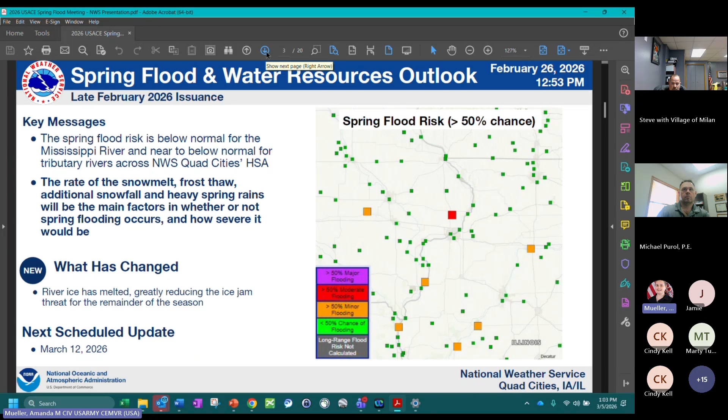So in general, things are looking below normal for spring flooding. So yay, I'm sure everybody's excited for that. It has been very dry. We've had enough warm spells that our frost has thawed in the local area, and it is thawing in other areas. So it's been decreasing overall, if not completely thawed. Probably after the next few days, it'll be a lot less too. And our local area here doesn't have really any snow other than maybe northeast Iowa a little bit, so we don't really have the snowpack. Up north, the snowpack is less. So overall, we're looking at it to be below normal.

So just looking at each of the factors here, and we'll get into each of these a little bit more, but as you can see, everything's either normal risk or lesser risk. The main normal risk is river levels overall are not looking as low as I might expect after such little precipitation in the last several months. And our frost depth when we did this was roughly normal. Now I guess it's if anything below normal since we don't have much. And looking at the spring weather outlook, maybe a normal risk. So everything else looks like below normal at this point.

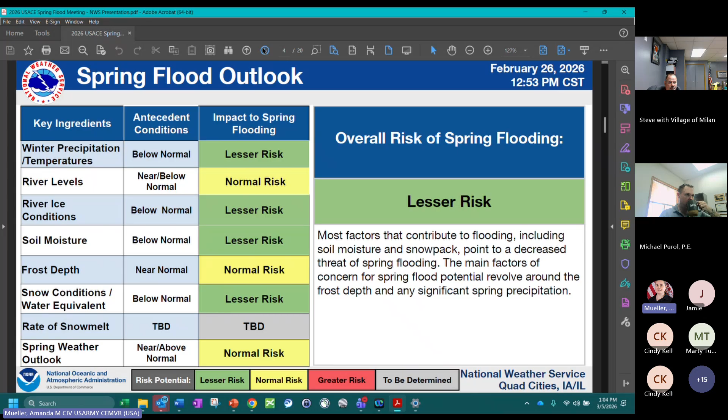So, not quite on. Okay, so temperatures and precipitation. Our temperatures in the western part of the state have been above average. Even though we've had some really cold temperatures, we've had some above normal temperatures, and it's kind of evened out overall to be pretty much average for the season. And for precipitation, you can see we've been quite dry. So no surprise there, we all experienced that.

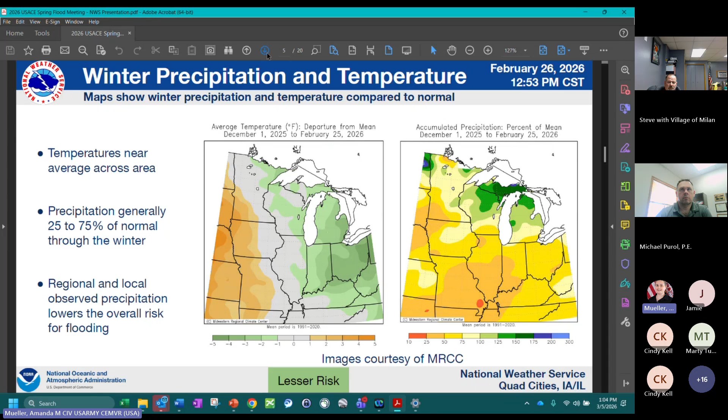And then looking at just the seasonal snowfall for the region, there's some snow to our north, and this was, again, from a week ago, so more has melted since then. But much of the snowpack to our north actually doesn't have as much liquid in it as you might typically see in a season. So while there is snow up there, it's not an overabundance.

Where you see the overabundance along the Upper Peninsula of Michigan and western lower Michigan is not coming toward the Mississippi River anyway. So I think they have an elevated spring flood risk over there. But if that water's not coming toward your area, then you're in the good spot, I guess.

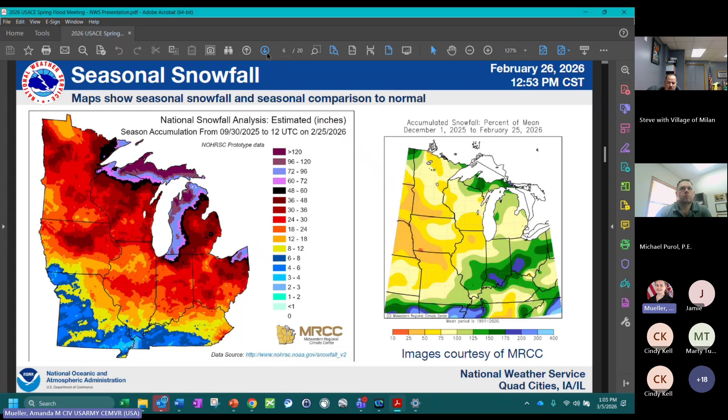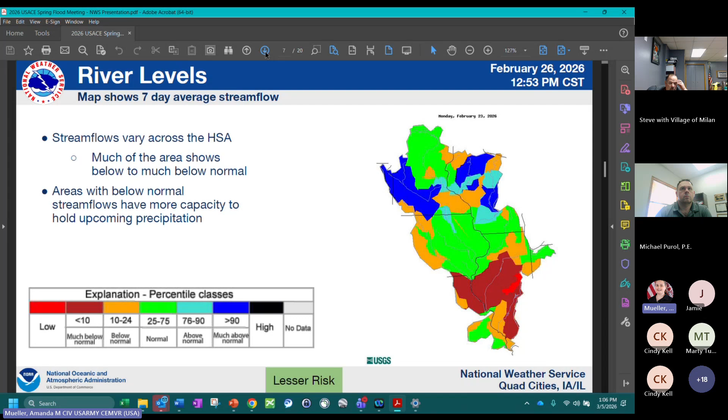And then stream flows, we're seeing a lot of them actually pretty well near normal. It really doesn't get below normal until you get south of here into kind of eastern Missouri and through central and southern Illinois. So eastern Iowa and northern Illinois are staying fairly close to normal right now.

And so when I did the first outlook of the season, we still had ice on a lot of our rivers. And then by last week, it was pretty much all gone. So we've pretty much eliminated our ice jam risk at this point. I think if we have a cold snap where a little bit is able to form, it won't get very thick and it's not going to last long at this point. So some more good news there.

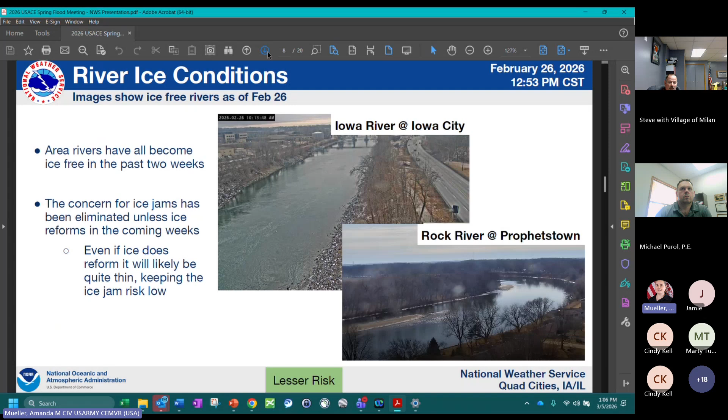And then soil moisture and our frost depth, you can see, especially for Iowa and Illinois, we're seeing a lot of single-digit readings, and then as you get into central Illinois, zero frost depth. And this was last week, so it's even lower than that.

And then you can see on the left side the soil moisture. So those warm colors are lower moisture in the soil. So the ground is able to soak in a lot of the rain that we might get. We've got some rain chances tomorrow and into next week, but hopefully for the most part, the ground will be able to soak that in.

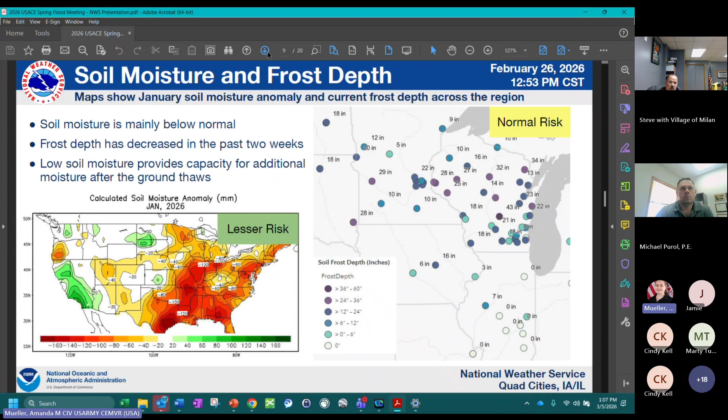So conditions are worsening a little bit here. Again, we'll see what happens the next week or so, if any of this can be downgraded a little bit, or if we kind of stay the same for a little while, because it's going to take some time to recover from this drought.

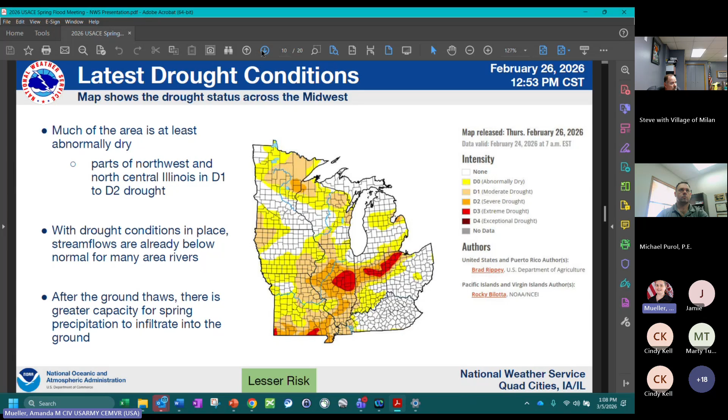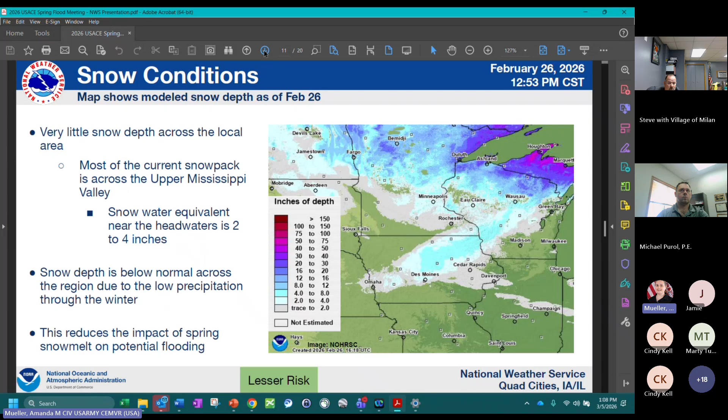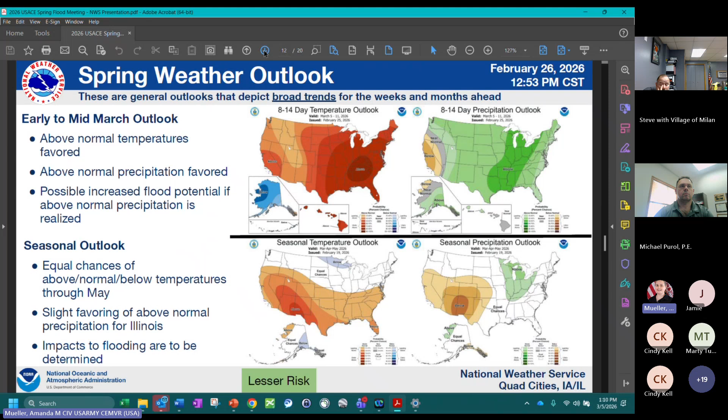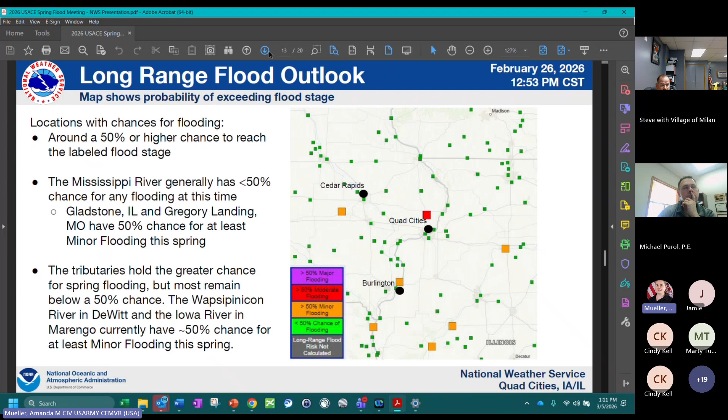The one red one there is the Wapsipinicon at DeWitt, and that's showing a 50% chance of reaching moderate flood stage. But I think these are some of the areas where we start seeing flood issues first. So nothing too major. So the key messages for the spring flood outlook: basically below normal probability. The one thing that could really change this is if we get into a really wet pattern and start getting a lot of rain.

If there's a lot of rain over the snowpack that exists to our north, and that comes down, especially along the Mississippi River, something like that. But if we get some light rains or very scattered rains, I think overall it should be able to soak into the ground, and we might see some rises in the rivers, but nothing too major.

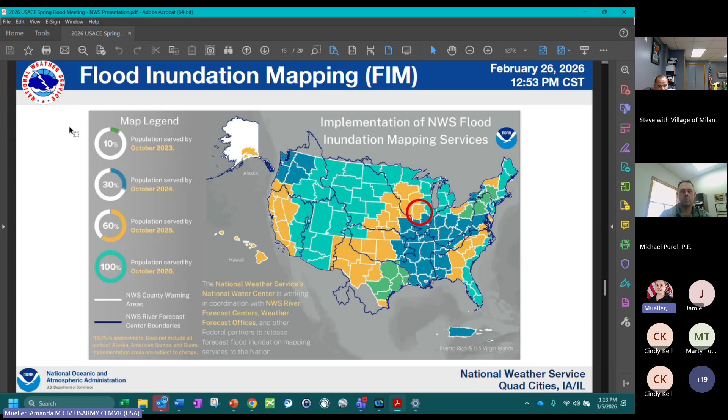We're checking a lot of areas where it is available to see if what is there lines up with what, say, emergency managers know happens when there is flooding. So we're still getting used to it. The rest of the country should be active with it by October of this year, and then we'll have these services across the country. So what is it? We're basically making a picture out of what we have been saying in words. So we say we're putting water on the map.

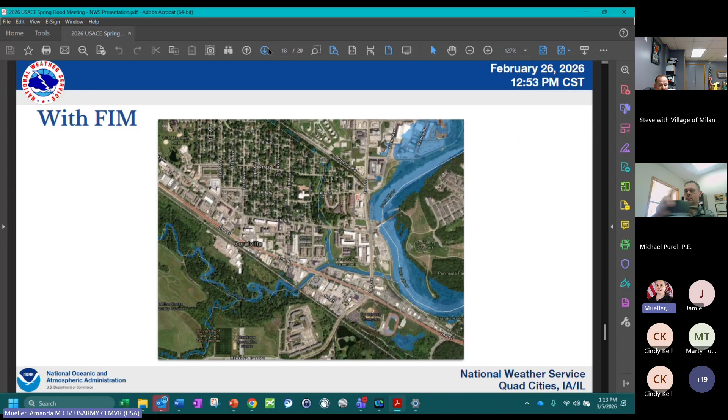So instead of having text and more text that you have to read through, it's going to look like a picture that can show you where flooding might be. This is just an example image along the Iowa River. There are two forms of it: dynamic FIM, the flood inundation mapping, and static. The dynamic FIM will take into account how much rain is expected, and then where we expect flooding based on that. The static FIM is more based off of, we know when the river gets to 23.5 feet that this happens, and then it makes a picture out of that.

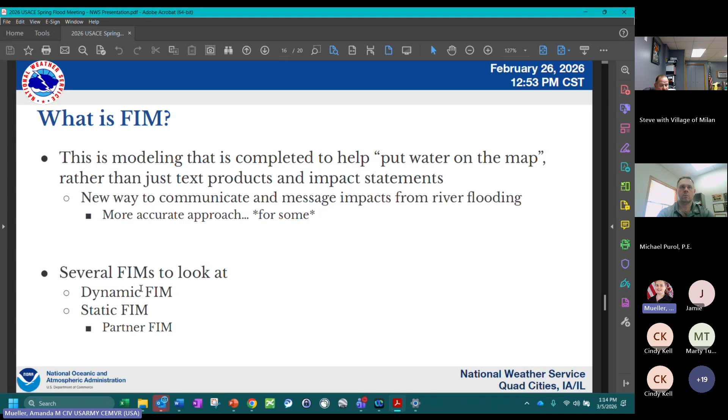So they're both used in different ways, and we only have a couple sites in our area that are partner FIM, with more detailed research, that can be used. I know there are some others outside of here, and probably people on this call outside of our forecast area, but they are few and far between overall. There are a couple of ways you can view the FIM. You can go on the National Water Prediction Service website, which is probably where you're getting river-related information if you're getting it from the National Weather Service.

When you go there and just add /FIM after water.noaa.gov, it will bring you to the site. You can see the CAT FIM is categorical flood inundation mapping, and that's the static FIM. So if you wanted to see if a location near you has that, you can go to the CAT FIM locations. There's also a GIS viewer where you can look at the FIM. I believe that is only the dynamic FIM, so it's only going to show stuff if there's flooding expected.

If you go there, though, you can see the entire country. And if you go south of here toward southern Missouri, southern Illinois, you can see some of it there. You'll have to zoom in to see it too. But you can take a look elsewhere if you want to get a feel for what could be available.

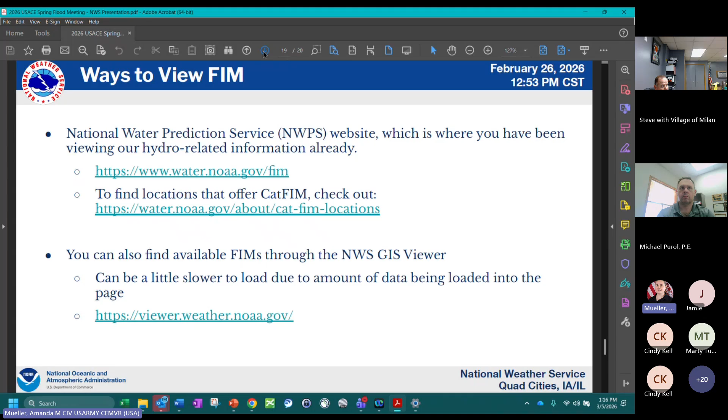And then the last thing here is our data collection needs. So I wanted to just mention that probably the best way that we're getting information from the general public, from any of you, is you can join CoCoRaHS. So you can go to their website. I have a few brochures here for people, but you can go to this website and sign up, and then you'll need a rain gauge. They use a 4-inch rain gauge instead of the 8-inch gauges that we use at our office. We still get great information out of it.

Down further on that application page, you can buy, I think, one of their gauges and let them know if you need one. But one of the nice things about this, I think, is that when we have our cooperative observers, they're expected, I think, to have an observation every single day. If they go out of town, they should have somebody able to take an observation for them, even if they don't report it back to us until they get back.

With this, if you're on vacation, then you can just do a multi-day report when you get back and say, when I got back, there were 2.37 inches of rain in my gauge. I don't know when it fell, but here are the dates, and then send that in. And that's still really helpful to know where the precipitation has been falling. And FEMA is actually now using these reports for disaster declarations too. So the more observations we get, the better that data is.

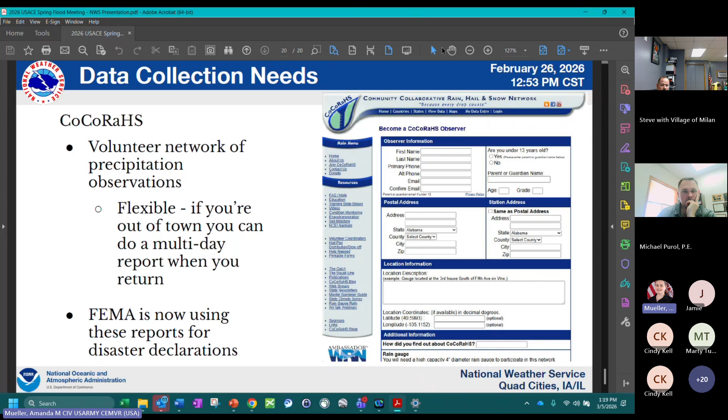All right. Next, we're going to move on to our partners at the State of Illinois DNR. Terra McParland's going to be sharing some of the data collection capabilities that they have and some new initiatives that they've got going on.

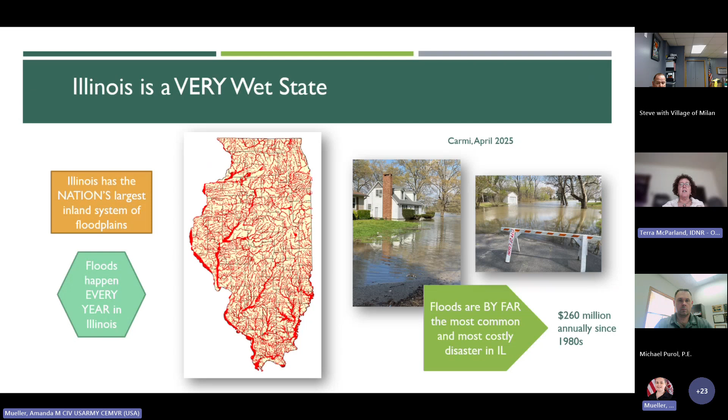So we all know Illinois is very wet, and I'm pretty sure the surrounding states have very similar problems. We have a lot of floodplains, a lot of rivers, and floods happen every year, whether they're ice jams, flash floods due to increased rainfall, or riverine floods that we've been talking a lot about today already. So next.

So the Office of Water Resources has three main divisions, and capital programs is where I sit. That is more of our technical resources. We have engineering staff, we have modelers, GIS, and survey crews. That's the group that does studies and actually implements some of the projects and programs that we have for the state. But then we also have a group called Resource Management.

Some people only think of the Office of Water Resources related to our regulatory program, which is you do have to get permits when you're building in a floodway or for dam safety. So that group is also within, so I just wanted to let you know that area is someone you would contact when you are building in those areas. And I'll talk a little bit more about that.

But we also do have coastal management, and that division is really just that little segment of Lake Michigan that touches Illinois. We do have three offices. Springfield is the one I sit in, but we have one in the suburb of Chicago in Bartlett, and then we have one downtown in Chicago. Next.

I do have links on all my slides if anyone ever wants to look at any of the websites I'm talking about. So first I'm going to talk about what resources we offer for when you're actually preparing this time of year, when you're thinking about flooding, where it might happen, doing some planning. These are the resources that we might have to help. So next, please.

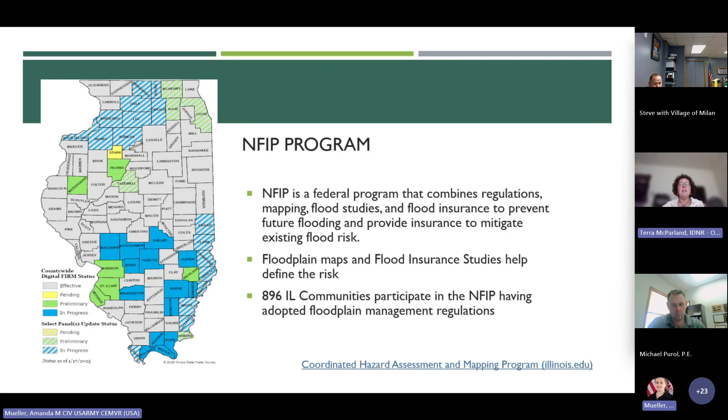It's partly a FEMA program, but the Illinois representative and, I know, all the other surrounding states have their own NFIP programs. So just be aware that that program exists and it does help you plan and think ahead and help revise ordinances to help reduce those flood risks in your community. Next.

We also in Illinois do have a mitigation program. There is a mitigation program through IEMA, which is our Illinois Emergency Management Agency, but our office does have some funding that is provided by our General Assembly, and there are certain requirements, but just know that we do have a small program within the state of Illinois that if your community has an interest, you would reach out to the Office of Water Resources to have those conversations. And I do have all of our contact information at the end.

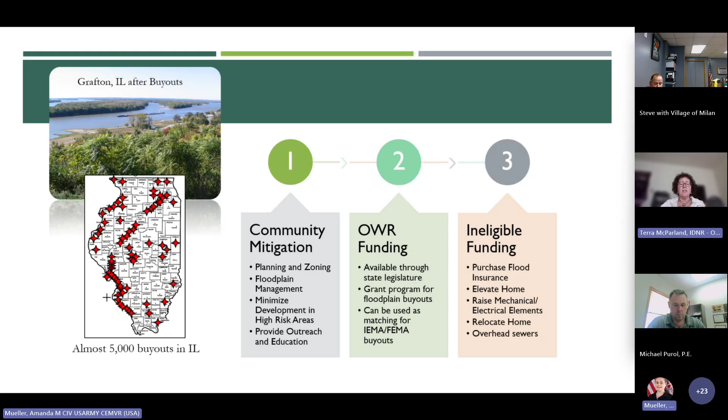For those that live in Illinois, sometimes we can serve as that match to the FEMA grant or to the IEMA grant for mitigation, which is many times buyouts. A lot of times for the federal share, we can be that 25% match to help communities that are disadvantaged and need additional assistance. Next. We also, as I mentioned, have the regulations and permitting section.

If you are doing any planning or development in flood areas that have been identified by FEMA, there are rules that have to be followed, and I'm just here to remind you that you definitely want to be aware of these rules, look into them before you do any construction, and have those conversations with our permitting section. Next.

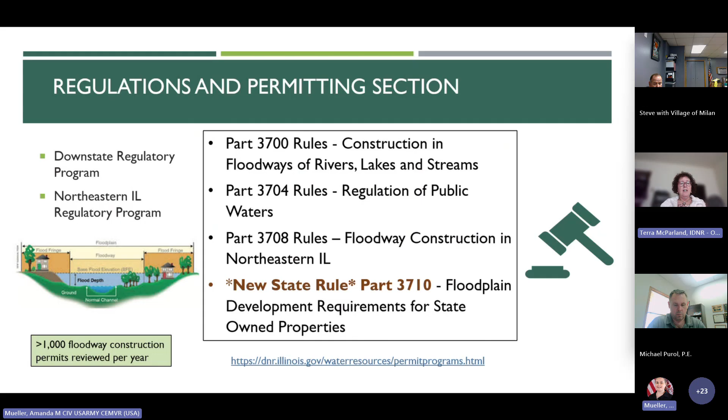And then we also at the Office of Water Resources do help different communities, agencies, our sister agencies, and sometimes federal agencies do those planning reports that are needed, your hazard mitigation plans. We can be involved in that. My engineering studies group can attend those phone calls and provide technical support. Just know that we're out there to provide a resource. Next.

And then as part of the engineering studies program, as I mentioned, we have those engineers and modelers available to help communities and to reduce their flood risk. And so we might come in and do a flood damage reduction study. We might look at alternatives. And then sometimes we can also do modeling if someone has a need for modeling.

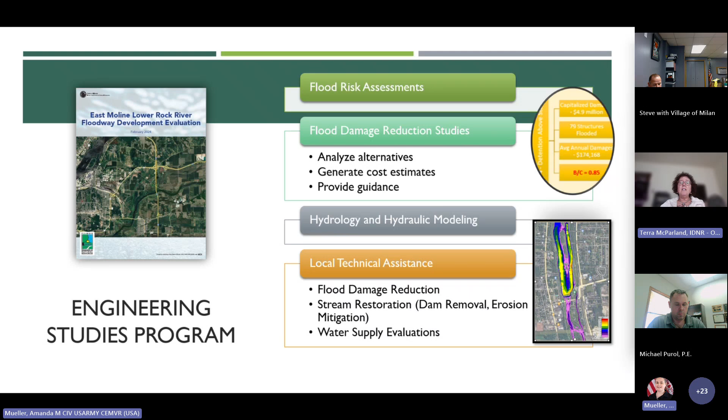At this point in time, we are focusing on disadvantaged or distressed communities, and there is a little bit of a wait list. But if you ever have need, please reach out to me. My contact information is there, and we can have a conversation to find out if you would qualify or if there is a way that we can assist. Next.

All right, now we're actually in a flood. Just like I will say, Illinois has had rain for the last 4 days. So I expect that drought is going to certainly rebound a little bit because all of central Illinois has been hit pretty consistently over these last 4 days, and we're expecting it next week as well. So that's good news for those that are concerned about the drought.

And the good news is, as Mary Beth mentioned, because the ground was so dry and all those other factors that are related, we're not seeing flooding. So, but let's pretend we're having a flood. So what kind of resources does Office of Water Resources offer? Next, please.

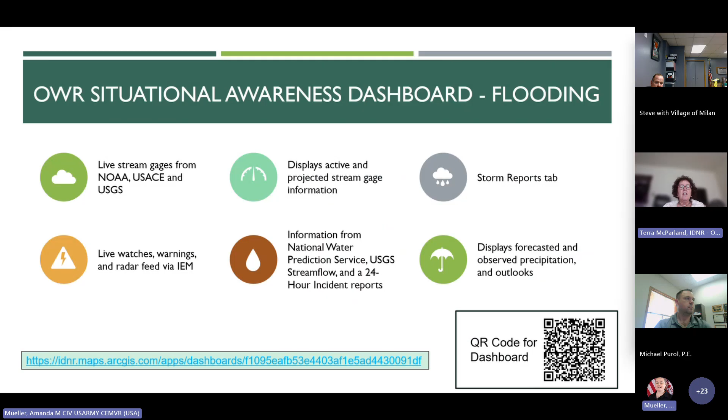So last year we unveiled this. I'm sure many of you are weather chasers out there and you're watching your areas to see where the radar's coming, what kind of flood you might expect. So I did work with our GIS staff and we've developed a dashboard. I used to have about 20 different websites open and I'm just flipping between them all the time, trying to track weather. So they put this together for me and I went ahead and made it public so that everyone can use it. And the link's there, there's a QR code. And the next screen will sort of show you what that is. Next.

So it basically shows the areas of concern, and there's a lot of different websites. We're not generating any new information. We're just summarizing it. So it's a one-stop, I call it one-stop shopping. So you just look here and you can really track where that flooding might occur. And just go on that website. Again, it's open to public and you just play around with it. You can click different areas. There's a lot of different weather resources and USGS, National Weather Service, all kinds of information on there.

So just play around. But at the end of the day, for me, it tells me which areas of the state are potentially flooding up to those moderate and major floods. Those are the ones that we really track. But next slide, please.

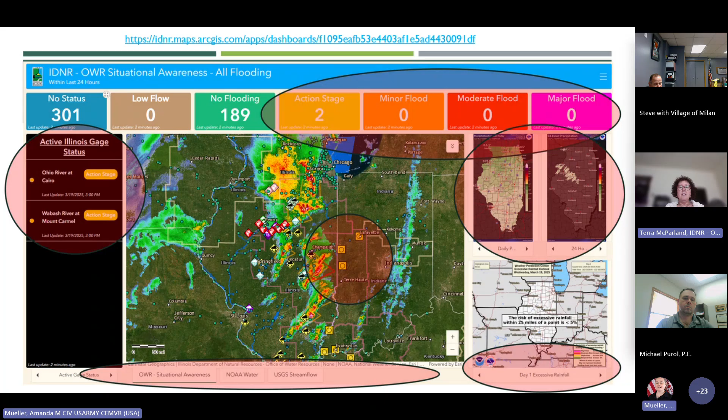And then as part of flood surveillance for my state, I do put together a flood report when flooding is hitting those moderate or major levels. I like to summarize all the information and I try to identify where those flood impacts might be occurring. And then last year we went ahead and developed a dashboard or story map that I will send out an email to alert. A lot of times it's the legislative groups, the Corps, IEMA. And if you have an interest in getting those alerts from me in the state of Illinois, you can just email me and I can add you. But right now we decided to go ahead and turn that into a story map.

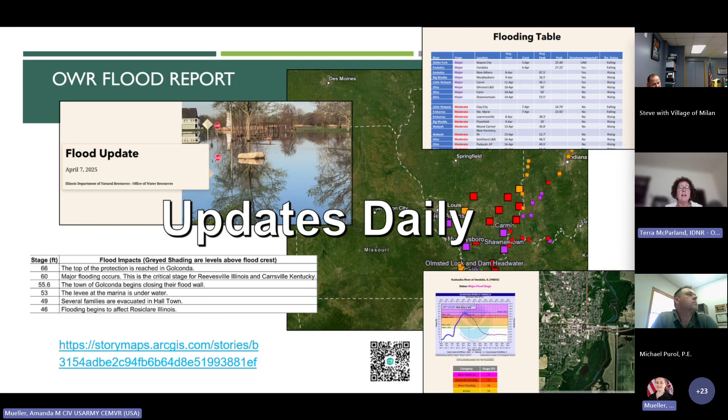So in the next slide, it actually updates daily. And so at any point in time, this summarizes all the very specific flood areas that we're watching, where those moderate and major floods might occur. And then it actually pulls all those gauges so you can look closely at those, see where those flood impacts are. And then when I send out my email, I will link you to this. In the past, I used to do this all by hand and try to screenshot pages to share with people, but now this is all automatic and you can look at it at any time. Next.

And then we do have a flood surveillance crew. So if you have an area that's flooding and we're watching, I can send out our crew and we go out and document. Again, it's more for those moderate and major storm events or the ones that are expected to hit record-breaking levels. And so what we do is we go out in the field and we take photographs. We document what flooding areas we're seeing.

And sometimes if it's a really high flood, we set high water marks and then we share those with our partners and they can use those to help calibrate their models that they've been generating over time. And I'll go ahead and do the next slide just to sort of show you what that looks like.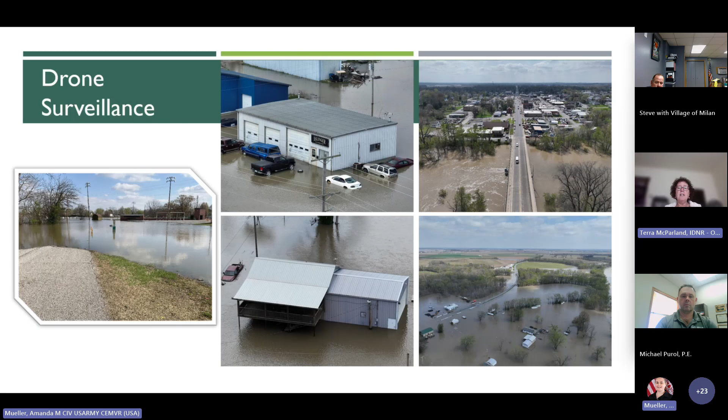And I would just add that we do try to track flash flooding. Those are a little bit harder to plan. So if you're in the state of Illinois and you're having an urban or flash flooding event or riverine, and you just want to know if I have a crew available, depending on availability and resources, I can send that crew out and document your flood event. Next slide, please.

And this was something cool we did last year. It was in Carmi, Illinois, Southern Illinois. They had a lot of flooding. We sent our drone crew out there and this is just a mosaic of about 1,600 photographs that the drone took. And we're able to really overlay those on aerial maps and show what flooding is happening at that moment. And that was really important to share with the decision makers and those legislative officials and things like that. So that's something fairly new, but I hope to continue doing that effort. Next.

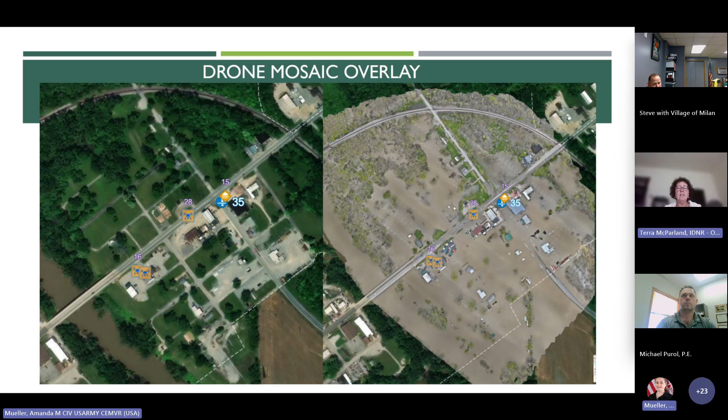And just another resource we have, Mary Beth talked about their inundation mapping. We've been working on this for a little while. Whenever we have very good hydraulic modeling, we're able to tie this into your flood stages. So we recognize that a lot of people don't always understand elevations, if someone says the water's going to hit a certain elevation, but you're very familiar with your flood stage right at your gauge that you live near. So we developed this tool, and these are just 3 separate screenshots.

So what you're able to do is if you're watching the weather and you find out that there's a projected storm coming and that the nearby gauge by your community is going to hit a certain stage, you just move that slider bar to what that stage indicates it's going to be. And then it actually develops an inundation map, and those are those blue areas. And it does also account for depth. So you can actually see how deep the water's going to go at those different areas.

And then you're able to zoom in and really look around in your area, and you can see which structures might be impacted, but you can also look at what roads might be inundated and also help you with your access and egress and emergency plans during a storm event. And then, of course, you can use this tool during planning and post as well. Right now, this is just available for the Mississippi River in this area, but the Illinois River should be published within the next year. And at any point with any of these resources, feel free to reach out to me and I can show you more of how to use them.

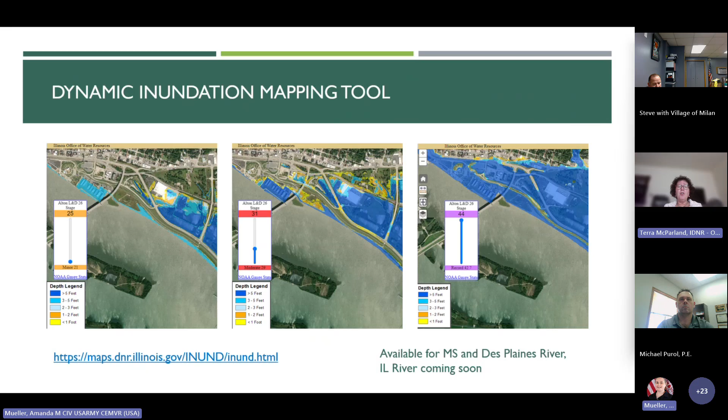All right, next, please.

And then we do have a great product that we've been developing along with the Corps of Engineers and other partners, and we call it the Structures at Flood Risk, called the SAFR website. What we've been doing is calculating flood damages for all the different flood frequency events, anywhere from a 10-year event up to the 500-year. And we're able to estimate how many structures and the value of the damages that could occur at those different flood events. And again, you can use this also during a flood to see where flooding might be occurring.

This is not open to the public, but if you have interest, we've been going out and doing outreach over the last year, and I can walk you through it. We have a user guide and we have videos to show how to use this. But if you're a planner and you have interest in really learning about some of that risk in your community or your county, then this is a great tool for you. Next.

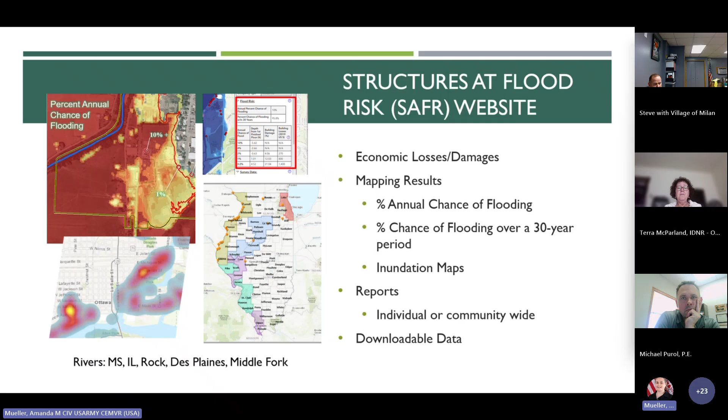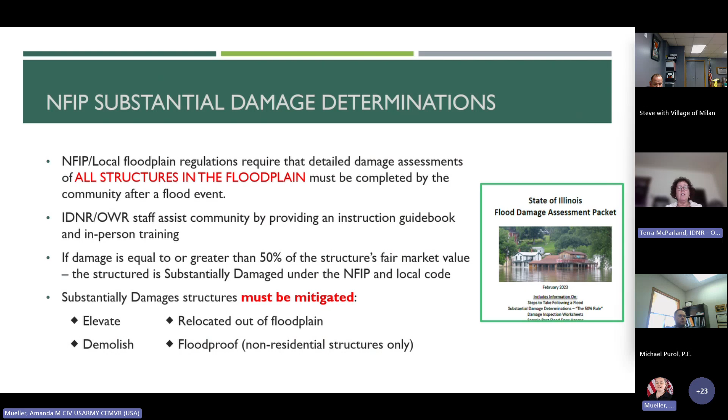All right, real quick, I'll go to after the flood has happened. What can you reach out to the Office of Water Resources for? Next, please. And for those of you active and part of the NFIP program, you do have some requirements after a storm to do substantial damage determinations, and those are slightly different than the ones required from FEMA. Those on the call that are familiar with this and part of the NFIP program are well aware of their requirements, but if you have questions or aren't sure if you need to do this, please reach out to the Office of Water Resources and the contacts in a few slides. Next.

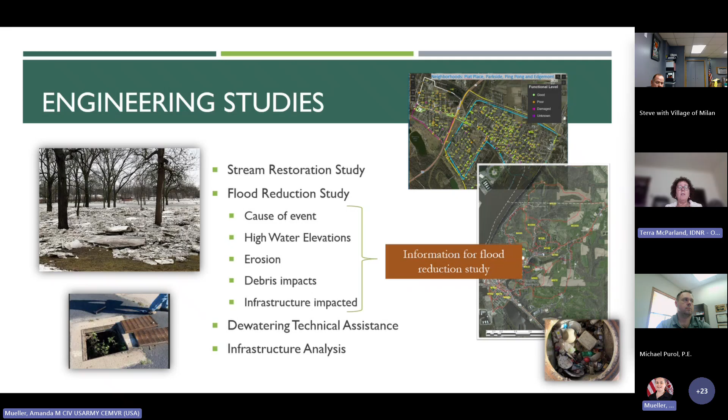And then engineering studies after an event: if you are realizing that you have some new issues that you don't have the capacity or technical resources to evaluate, you could reach out to us, to engineering studies, and we could try to look at some of those issues and see why you had that flooding. Sometimes communities will reach out if they're having trouble dewatering after a flood event, or just to evaluate some of their existing infrastructure to see if there are ways to enhance it and reduce their flood risks. Next.

All right, so that is all I have, and here are the contacts for those different groups that I was talking about. If anyone has questions, please feel free to reach out to us. And I always do give a plug that we're a state agency, we're here to assist you. So if you see a tool or a resource in some of your surrounding states that you think would benefit many people in the state, please reach out to me and give me your ideas, because we're always looking to improve. So I appreciate the opportunity, and if there are any questions.

Great, thank you, Terra. I don't see any questions in the chat, but I did want to ask: during an event, if a community has need for some of the resources that you just mentioned, would they go through their county EOC to request that support during a flood event, or should they contact these POCs that you have listed on this last slide directly?

Yeah, I think for now, I know the communities are very used to reaching out to their EMAs and they are welcome to do that. I don't want to break that process. But if they have questions about how to use the resources that I specifically outlined today, or if they're having a flood event and they really want me to come out and take pictures, they're better off reaching out to me directly, and then we can have that conversation.

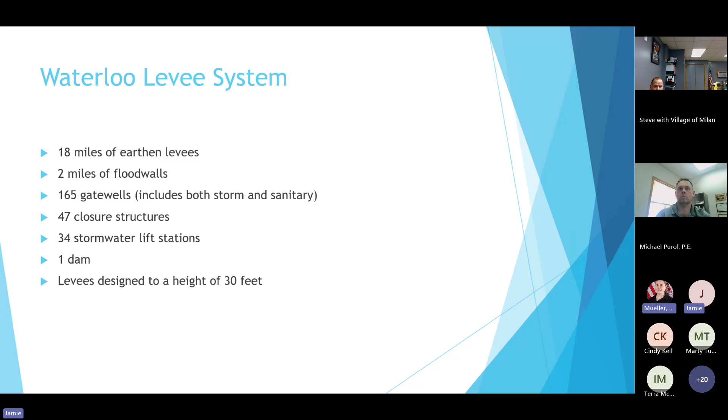A little history on our flood control system. We've got 18 miles of earthen levees, 2 miles of flood walls, 165 gate wells, which is an ungodly amount, 47 closure structures, 34 lift stations, and 1 dam. It's a very large system, at least in my eyes, having to deal with the sheer number of penetrations through the levee. It's really interesting to keep it all maintained. And our levees are designed to a height of 30 feet.

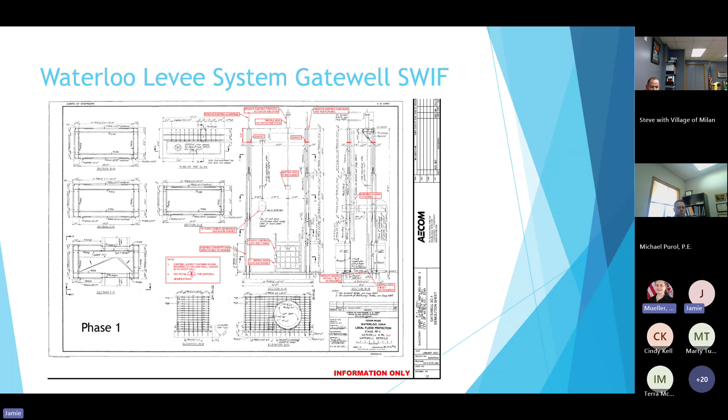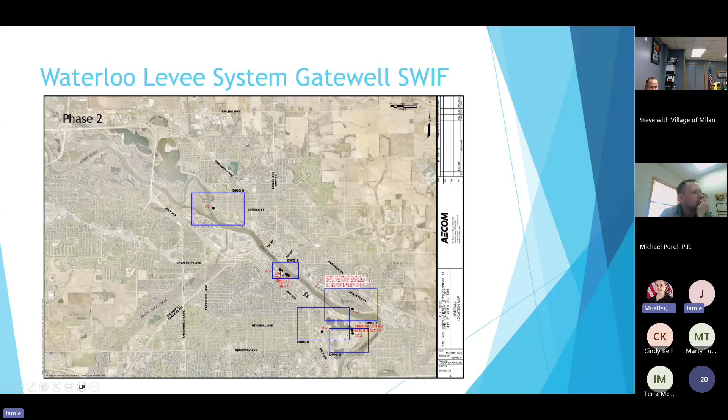And then this one, it was a little different. The Corps had placed along here, I think that shows on the next page, all of the sanitary sewers that came out to our interceptor on what would be the wet side of the levee. They ended up putting plug valves on the sanitary sewers as they came under the levee and out to the interceptor. One of the things with a plug valve is if it goes bad, you have to dig into the levee.

So we came up with a plan to go ahead and cut all of those sanitary lines from the side streets. We installed a new trunk line down on the dry side to a new gate well, and just had one new connection out there. And then we were able to abandon all of those plug valves in place, filled them full of grout and left them there, which was a really nice way to get rid of 4 of the closure structures and get it down to 1.

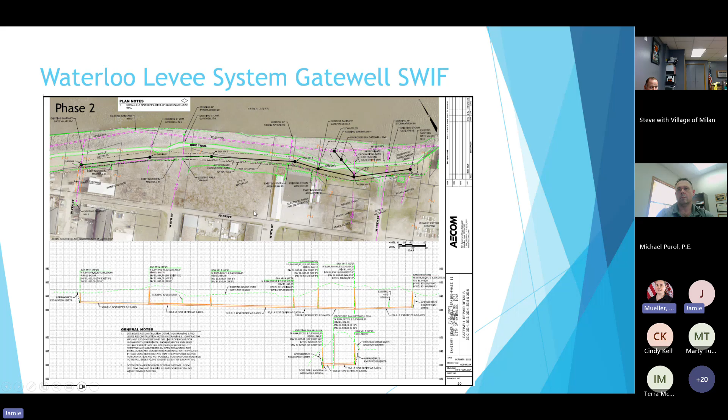Again, just another portion of that phase 2 gate well SWIF. You can see on some of these, we were having to go in and come clear down and cut through a big chunk of the levee in order to get some of those replaced.

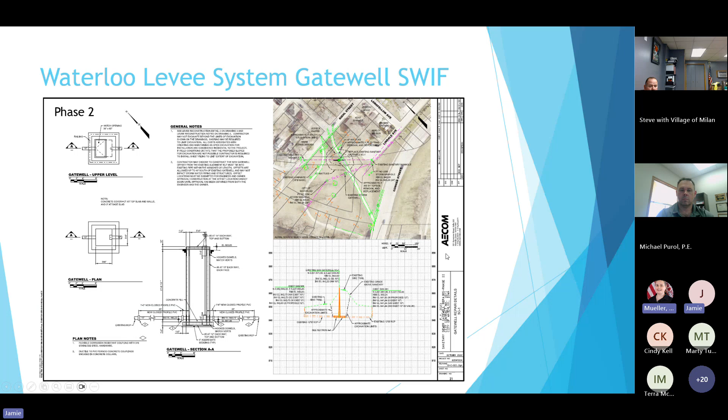So it's one of those that was a long time coming, and everybody is extremely happy. And a lot of thanks to the Corps for their help and their willingness along the way as we worked our way through this.

Our second SWIF was for a relief well. Been doing this a long time. Didn't even realize we had relief wells on our system, to be honest with you. We happened to be on a webinar and got to looking and did a little more research on our end, and oh my goodness, we did have 2 of them on a stormwater lift station.

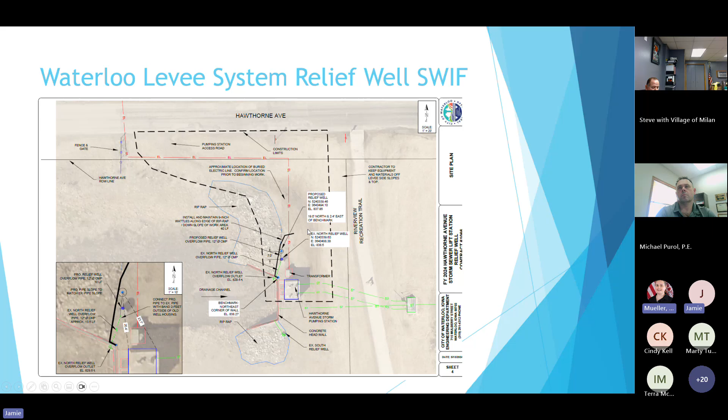On a system this big and this old, neither they nor we were able to find any baseline data for our wells. All we knew was that one well on the south end of our lift station seemed to be okay, and one well on the north side didn't seem to be okay. So, working with the Corps, it was determined that we would be able to leave the south one alone, and then go ahead and redo the north one.

So my staff worked with Terracon and the Corps pretty closely to come up with a new set of plans in order to abandon the old well in place and then install a new one. And what you're seeing here is where the outlet piping comes through the existing wing wall of the inlet structure for the lift station.

The old well that we abandoned in place, we cut down a bunch of it in order to extend the outlet to our new well, which we drilled about 10 feet directly north of the old well. It was about an 80-foot deep well, somewhere in that neighborhood. Yeah, about 80 foot deep.

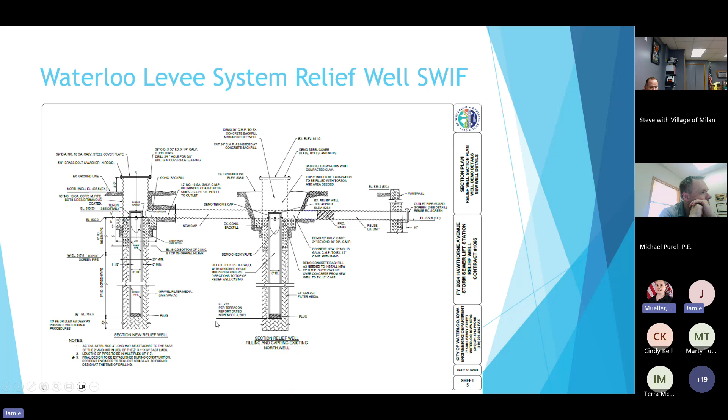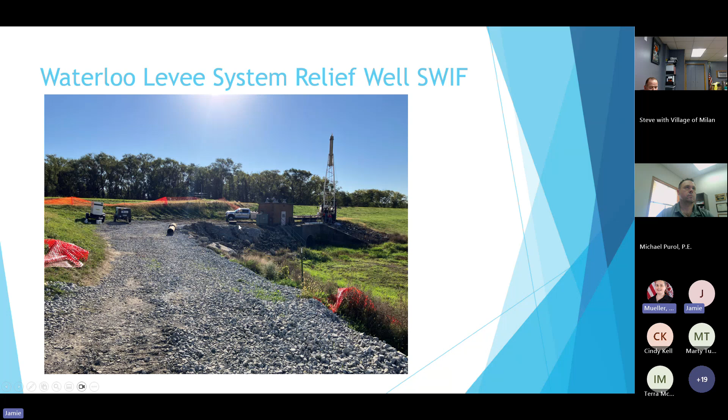So there's some pictures, and I want to give you a little idea of what this is. Here's our contractor working on testing the south well. You can see our new north well here. It was actually really interesting. If you've never dealt with a relief well, what you're seeing here, if I was able to zoom way in, is the screen for the well going down into the well casing itself, and then adding the gravel pack to it in this particular one.

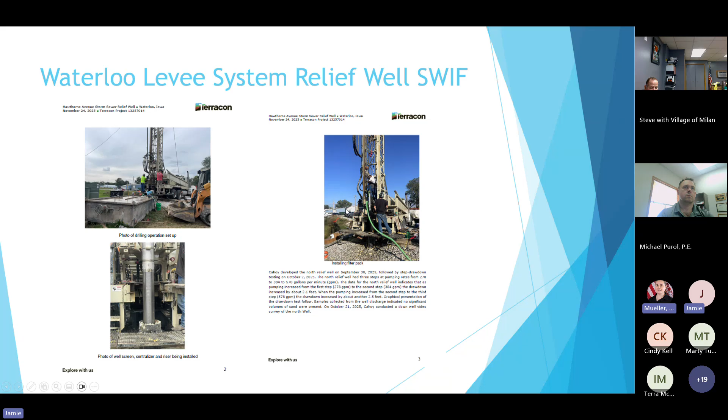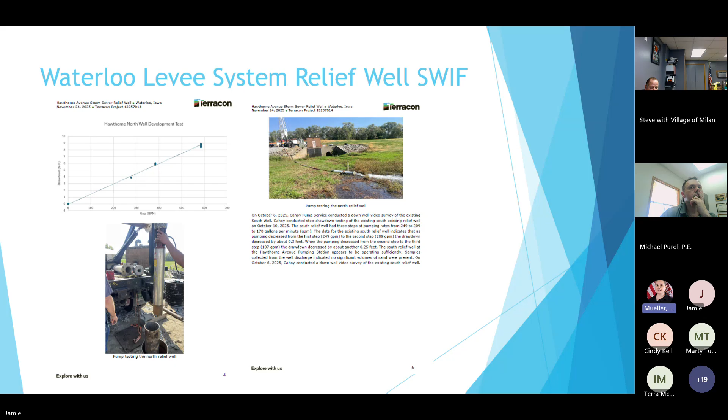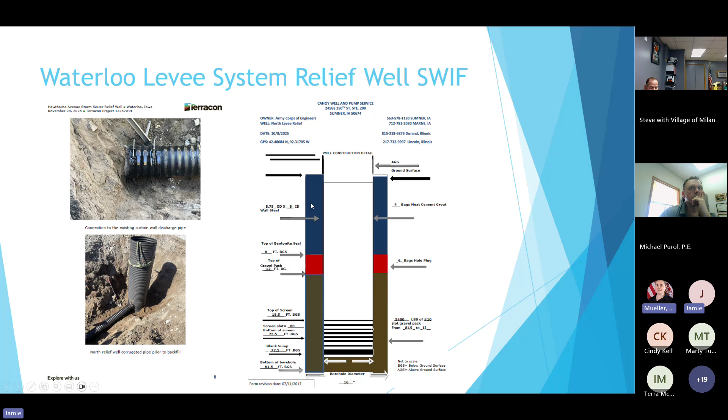But we spent an awful lot of time with Terracon and the Corps to get us to the point where we could go ahead and actually drill this thing, test them both again. The longest part of all of this, believe it or not, was actually with Terracon and being able to get a drilling program put in place. I think that took about a year, I believe, and working with the Corps to get that in place and make sure everybody was satisfied in order to drill the new well and how to abandon the old well.

This project took about 3 years or so to get through that process, get it drilled, and the old one abandoned. Now, as we've learned, there is a requirement that we test these 2 wells on a 5-year cycle. So now that we've got them drilled, we can continue to test those on that 5-year cycle and make sure we're in compliance on that portion of our O&M manual.

So just some lessons that were learned along the way from our couple of SWIFs. Again, as I said earlier, I think we were maybe the first one that had to go through this SWIF process, and when you're kind of the first one, you don't know what you're doing, and there's no examples, so it was a little scary, to be honest with you. But we spent, again, a lot of time with the Corps and their staff, and they were absolutely great to help us get through this process. There was a lot of back and forth with our documentation and the things that they wanted to see, so it was a really good partnership.

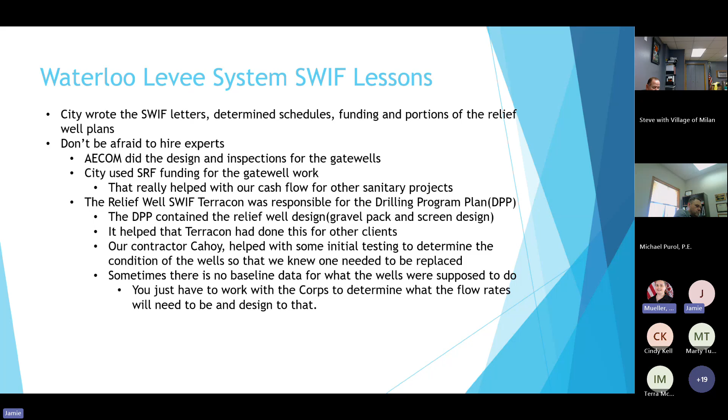So again, these things can be kind of scary when you're looking at them, but if you have issues that you know are going to take time, a lot of effort and a lot of cost, the SWIF is a great way to go to keep your levees active in the rehabilitation program, knowing that you still have time to work on some of these problems.

And that was the biggest thing for us, is that we were able to schedule this stuff so that it fit our funding needs. And that was, I guess, the biggest benefit to the city. And if I had more issues, I would certainly use them again.

I've got my contact information up on the screen. Certainly you can contact either myself or my assistant, Wayne Castle, who did a lot of this work as well. We'd be happy to talk to anybody that's entertaining the thought of doing a SWIF, providing some of the letters and some of the background information that we have. If that's helpful to anybody, we're more than happy to share it, but it's a really good process to use. And I would encourage anybody that's concerned about how to maintain some of these things on their systems to look at this and talk to your Corps folks, and see if they can help you with this.

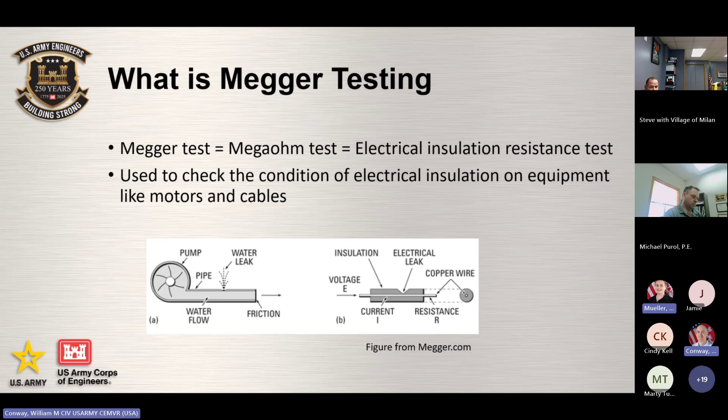USACE inspection requirements derive primarily from the Code of Federal Regulations, which basically says Megger tests of all insulation shall be made whenever wiring has been subjected to undue dampness, and at least once every year, and a record should be kept of the test results. So in the USACE levee inspection reports, and it's been like this for a long time, as part of the checklist portions, this is a snip from one. Under the pump station section, it talks about Megger testing shown here.

To get an acceptable rating, the Megger test has to be done in the last year, and it needs to show that the installation meets manufacturers or industry standards. And something I should clarify, Megger testing only applies to electric pumps. We don't require Megger testing for diesel pumps.

And a little more about this inspection, just for your awareness. This line item on the inspection report for Megger testing is not one of the 18 critical line items, if that sounds familiar at all, that the Corps uses to determine eligibility for the Public Law 84-99 rehabilitation program based on the current rules. So it is possible to get an unacceptable rating on this if you don't do your Megger testing, but it doesn't affect your PL 84-99 eligibility. But I'll talk some more about why it's a good idea.

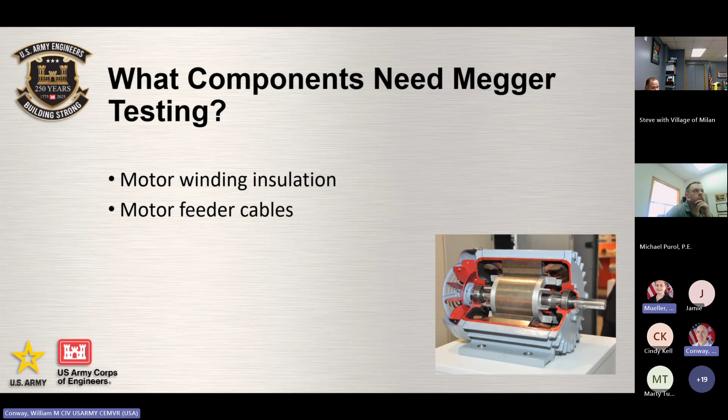So first, the primary components that need to be tested are motor winding insulation, which is the insulation system that surrounds and separates the copper windings of the pump's electric motor from each other and from other components, so they can carry voltage without shorting or leaking current to the ground. And then also motor feeder cables that carry power to the motor. And there may be other components in your pump station that should be tested. You kind of leave that up to an electrician, but these are the primary ones that we think of.

So it's important because insulation degrades over time due to moisture and temperature cycling between hot and cold over and over again, and contaminants like dirt, especially, and oil. So routinely documenting and plotting Megger test results can help identify how much degradation is occurring and how fast. And I'll talk more about that later. And a failure of your insulation in your pump components can cause an unplanned motor outage or damage to equipment and also personal safety hazards potentially.

The bottom line is Megger testing gives you an early warning so motors can be repaired or replaced before they fail. Since the worst possible time for them to fail would be during a flood, you'd much rather get a heads up early. So it's sort of an investment then to improve your odds against that sort of disaster.

So what the results can look like is if you're seeing low insulation resistance after a flood or high humidity, that might just indicate moisture in the windings or the cable insulation, and that could be reversible by drying it out and potentially cleaning it. Or if your results show a declining trend over multiple years, that would suggest aging insulation or contamination or hot-cold cycle thermal stress. But knowing that would allow you to plan for refurbishment or replacing it before it fails.

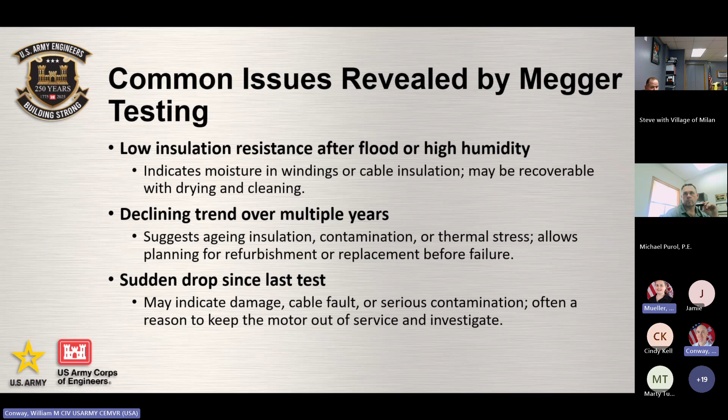And then if a new Megger test shows a sudden drop compared to the last test, that might indicate damage to the insulation or a cable fault or serious contamination. And if you saw that, that'd be a reason to really consider keeping the motor out of service and investigating further. So Megger testing does not diagnose every problem your electric motor could have, but it's a key early warning indicator for many insulation-related failures.

So it's performed typically using a handheld tester, which is shown here in a picture, which is called a megohmmeter, or it's just called a Megger tester. A bunch of different brands make these. They all do basically the same thing. It measures how much the insulation resists current flow.

The tester itself, although you can't see it in the picture, has two lead wires that come out of it, a hot lead and a ground lead. The hot lead applies voltage to the wiring, and the ground lead senses any leakage. If it reads high resistance, so many megohms, that means good insulation. If it's reading low resistance, that means you've got some kind of deterioration or contamination, or you're developing a ground fault.

An important thing about Megger testing is it's a non-destructive test, and it's a pretty standard condition assessment tool for rotating machinery used in industry. Like other electrical work, Megger testing should be performed by qualified electrical professionals familiar with this sort of work. For a levee sponsor, if you are a city, you may have in-house utility or public works electricians trained in this sort of testing who know all the safety protocols like lockout, tagout. If you're not a city, you can contract industrial electrical contractors experienced with this sort of testing, ideally for water, wastewater, or stormwater pumps. And there are specialized motor shops that can do this testing and follow the standards.

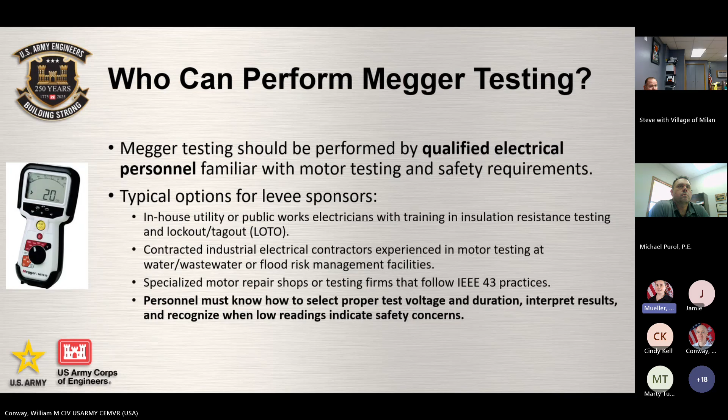If you would like more information about Megger testing, here's a couple sources of guidance. For the Corps, the main one is Engineering Manual 1110-2-3105, Mechanical and Electrical Design of Pump Stations. For the details, it refers back to the main industry standard, the Institute of Electrical and Electronics Engineers Standard 43, the recommended practice for testing insulation resistance of rotating machinery. If you hire someone, that's the standard they will probably follow and should follow.

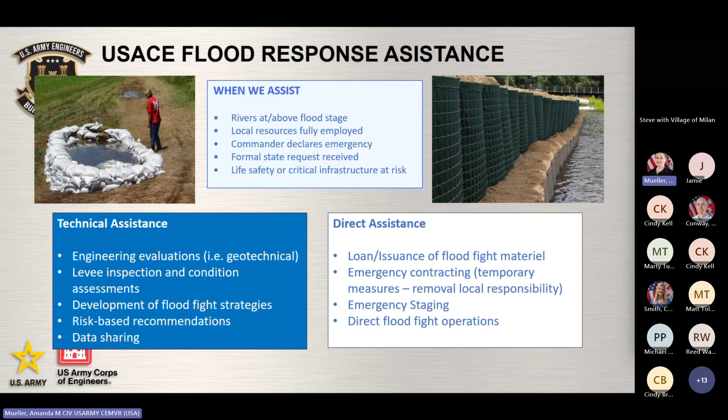The other type of assistance is direct, which is the typical issuance of supplies and equipment. We can do emergency measures to support high-risk areas. We also can do rescue operations if that fits the situation. We have the equipment available, and directing flood fight operations is also something we can do, but the legal authority resides with the local entity. Our assistance is meant for life safety and protection of property, and it's meant to be temporary in nature. And we cannot provide assistance directly to individuals.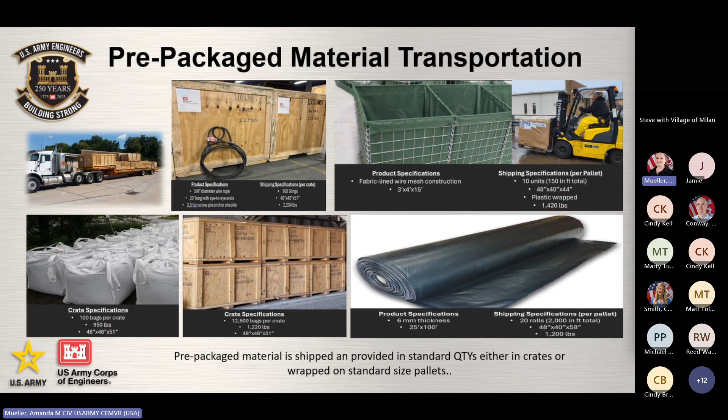I would just say for a recommendation, we prefer to issue in the crate or in the pallet instead of breaking them down. So for example, that 4x4x4 crate of sandbags holds 12,500 bags per crate, and I think they're bundled in 500 or 1,000 per crate. For example, if you request 10,000 sandbags, we're probably going to give you 12,500. So just to give you an idea of how we're thinking, and we can talk to you more about that when things get crazy.

Next slide. So I have some great folks in my office who wanted to really determine the best way to load material on flatbeds, and so they came up with some drawings here to show if you wanted to deploy 3 8-inch diesel pumps on a 48 or 53-foot truck. This is how we would try and set it up. That would include all your suction hose and the wire baskets containing the discharge and other appurtenances.

And then also they did it for Crisafulli. So it just gives you an idea of how we would load this onto the trucks if the request is received. The requester should plan on transporting any size pump via trailer, and the supplies all have to be tied down. So just be prepared for that when you're bringing your trucks out. And towing capability of the smaller pumps is only intended for short distances. It's not highway rated, so you shouldn't be towing those smaller portable pumps on the highway other than just crossing. We just want to keep those in good shape.

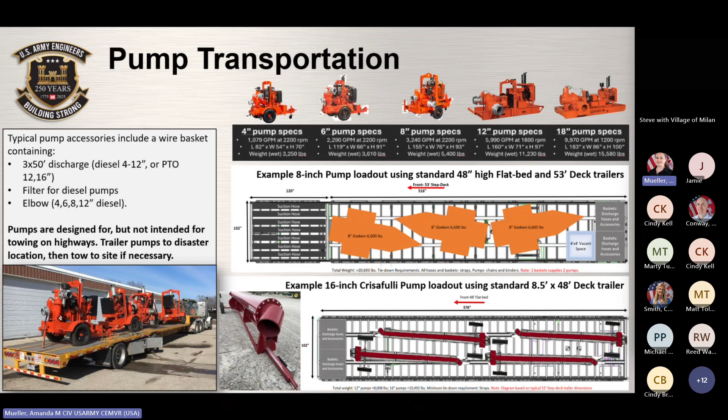In addition to that pump, like you mentioned, the wire basket with the hose and connections all needs to be transported, and the weight and size of the baskets will vary depending on the size of the hose. Something to consider. Next slide.

So our flood teams, one of the primary activities that is going on out there is data collection. It's very important that we capture and understand what's going on in the field, what's going on with the levees that are active that are in our PL 84-99 program. We're looking at ongoing flood response operations by the local communities and the levee sponsors, and we're trying to track the performance of those systems and temporary barriers.

The other things that we could be doing out there or could be asked of us would be ground surveying for emergency measures. This is something that we've in more recent years been going out there and doing, where we've identified a community installing even a sandbag wall. We're trying to capture that survey height. We can also deploy our drones through our UAS program. And this is very similar to what the state is doing. So we might be doing similar things out there, but they can capture aerial photography, LiDAR, and heat sensing.

And then if this is a large event where we're expecting we're going to be nearing or exceeding record flood stage, we're going to pull together our field data collection team that has the subject matter experts that are out there to really identify the severe issues at those peak elevations, and they're following the crest down to document the performance of those systems. And they're doing that via observations, aerial imagery, different surveys, but we have the right specific technical experts that are capturing that information.

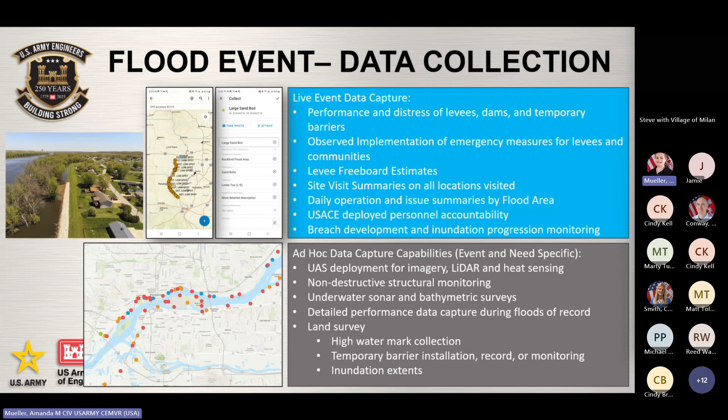So this is just a lot of pictures of our great folks, flood area engineers that are out there performing that technical assistance. Hopefully, if you see one of these people out, you see that Corps shirt, you are reaching out and grabbing them and talking to them, introducing yourself, making sure that they know who you are and how they can support you. They're supplementing or training additional personnel on performing field patrols. They can also help provide response recommendations based on current and past observations. They're out there monitoring areas of distress, as mentioned, training on proper flood fight techniques, collecting data, identifying low spots, and making recommendations based on that.

I think the big thing is that we hope that you consider them part of your flood fight team, flood fight operations, because they can really serve as an extra set of eyes and ears for you while they're out there, and it's also good training for them. Next slide.

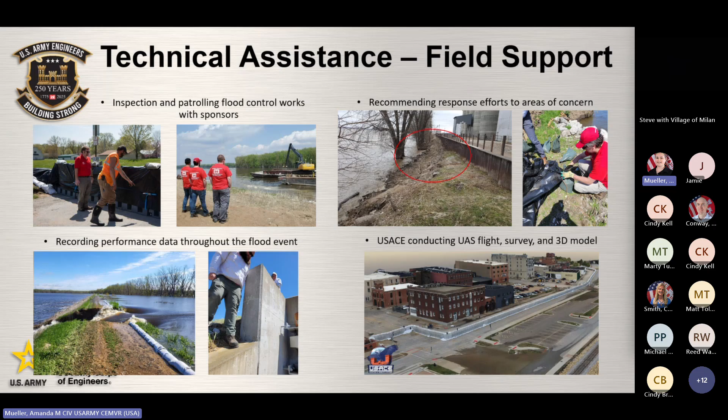Okay, so Amanda asked that we highlight some examples of some of the technical assistance products that we've provided in the past that we might be able to assist you with and provide you with some reach-back assistance if you ever need that. So what we've got here is in A, this is the levee system with an active repair area that is concerned about capturing all low spot freeboard areas. So this map was produced for the sponsor to basically communicate to volunteers where they need to focus their flood efforts. Map B is a typical incident map that we might create that's produced for levee breaches, and this provides an estimate of the inundation area and depth, and it's good for evacuation notifications and sending alert messages.

And then in C, up there top right, this map was requested to estimate the inundation area of a community based on forecasted river conditions. And the community used it to inform residents and decide on whether to install emergency barriers or not. So lots of tools for helping you to make decisions.

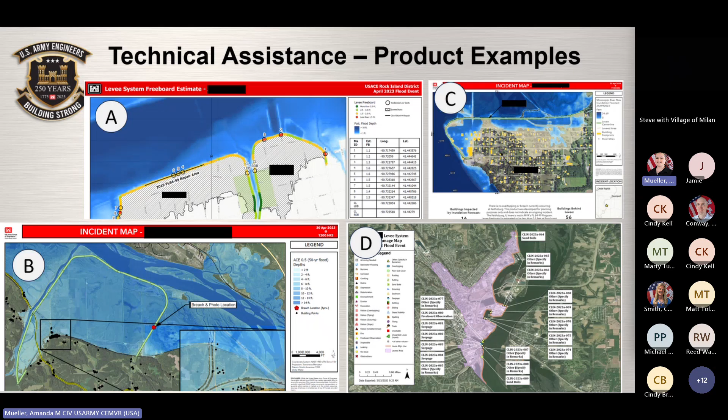Those are just some examples. And then a last would be temporary barriers: an example would be if there's temporary barriers installed, like it could be push-up, it could be a new barrier that's installed downtown, we can provide mapping for that. Next slide.

This is just a plug for a great resource that's out there for mitigation planning, the Silver Jackets program, and hopefully many of you are aware. I think Tara is part of that for the state of Illinois. Each state has a specific team that can provide you with a point of contact. The points of contact are listed within that link that's provided on the screen, and it's generally a multi-year effort tailored to the specific needs of your area, your community, and it's a state-led team that's doing that

work. The resources for the team's activities are provided through individual programs for each participating agency, and it's all based on authority and available funding. But we do have Corps Silver Jackets representatives that are part of that team, and we have the lead for the state of Illinois and the state of Iowa for that Corps representation. There's a lot of examples of different products that have been developed within the different states. That might be good information for you to check out as you decide what you need, if you have any specific mitigation needs. Next slide.

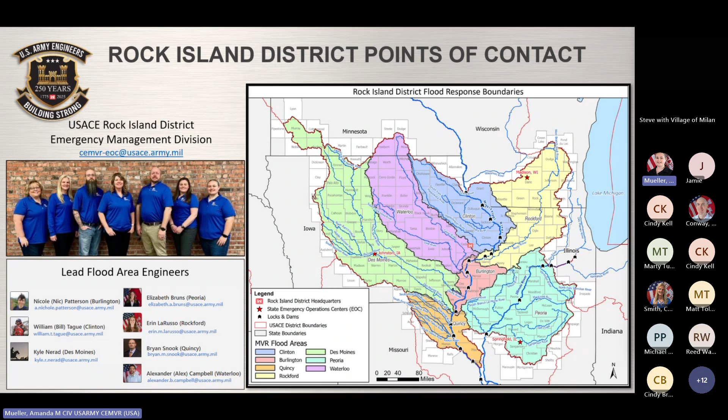So I will say too, like Sarah said, if you see the folks out there in the red shirts, go ahead and grab them. But if you don't see them and you need them, use those contact links that Sarah just talked about, and we will get them to where you need them.

I want to appreciate everybody who presented today. I want to thank Jamie for his presentation on the system-wide improvement framework and their experience with that. It is a process. We know it can feel like a headache trying to maneuver through it, but our goal is always to ensure that we maintain sponsors' eligibility for repairs, and the system-wide improvement framework is the tool for us to do that for these complex issues. And I anticipate that we're only going to be using it more frequently down the road as we get the new language for the ER 500-1-1 as changes occur there. So we appreciate and are willing to work with the sponsors, with you all, to get through that process as carefully as possible, where we're not causing too much burden.